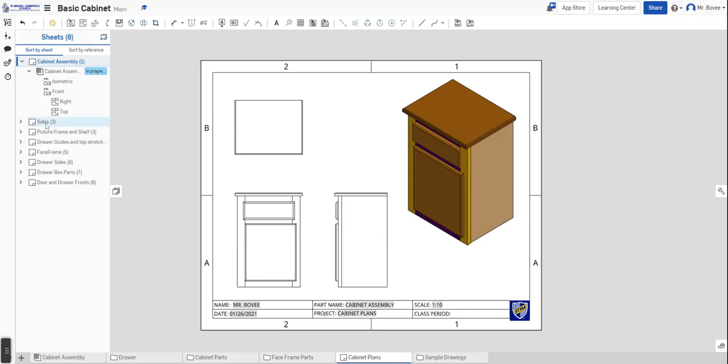The plans are provided on the Google Classroom. Start with page 1, which is an overview of the project. It has an isometric as well as the orthographic. Notice there are no numbers, since the numbers show up on page 2. You should have completed the video where we drew the two sides, and you probably used this part of the plans and those numbers.

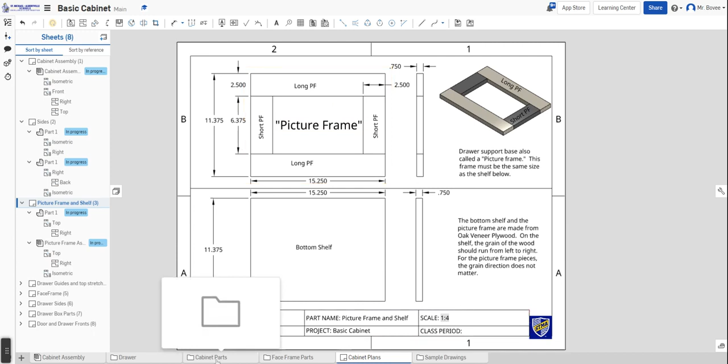This next video is going to show how to make the picture frame and shelf. Where and what do the picture frame and shelf do? Let's take a quick look at the assembly.

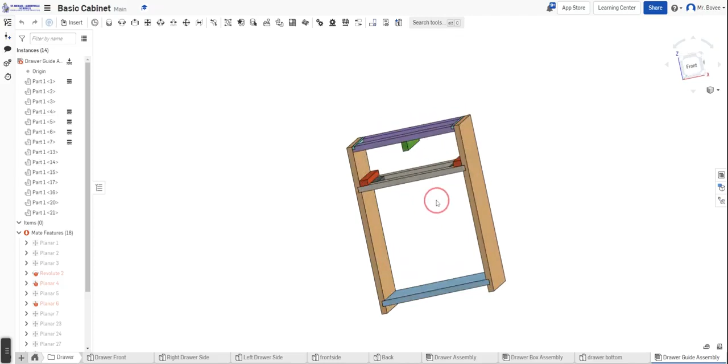Right here, this is what I call the picture frame. It's just a simple term I use, not a professional cabinet term. And this is the bottom shelf right here. So those are the two parts we're going to make today, and they help get us constructing the cabinet.

This is the exact sequence we follow when building a cabinet. We start with the sides first, then build the shelf, then build the picture frame, and then glue them together to make an assembly. That's what we're going to do today in this video.

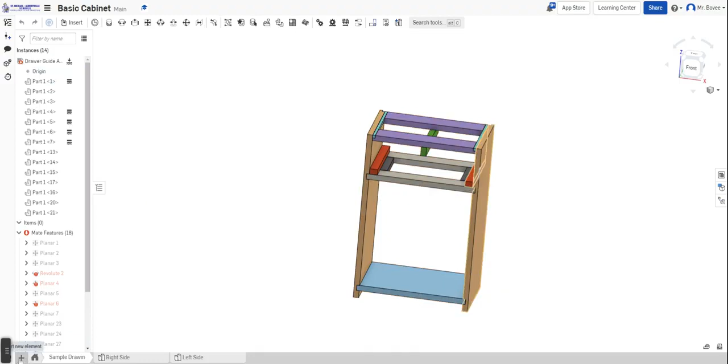We're going to replicate real life. I'm going to open a file called Sample Drawings, where I'm going to build this drawing. I already have it drawn, but we'll create a new drawing by going to Insert a New Element, Create Part Studio, and we'll rename this.

We'll rename it Shelf. If we go back and look at our plans, which I won't do since we want to keep this a quick video, that rectangle was 15.25 by 11.375, which is 11 3/8.

When choosing a sketch plane, I like to choose the one that best represents how the part is going to fit into the assembly. It doesn't really matter which plane you choose, but it makes your assembly easier if you pick the one that best represents how it sits. This shelf lays flat, similar to the top, so I'm going to choose the top plane.

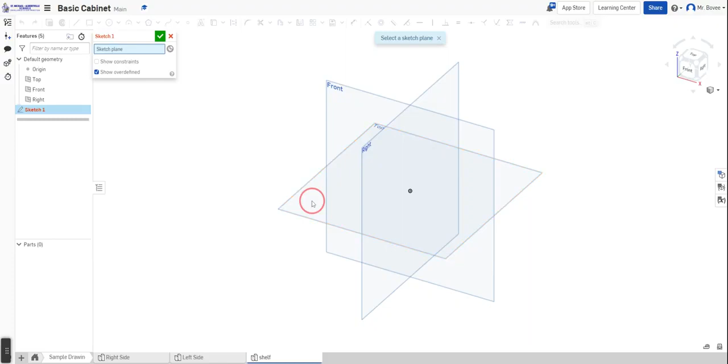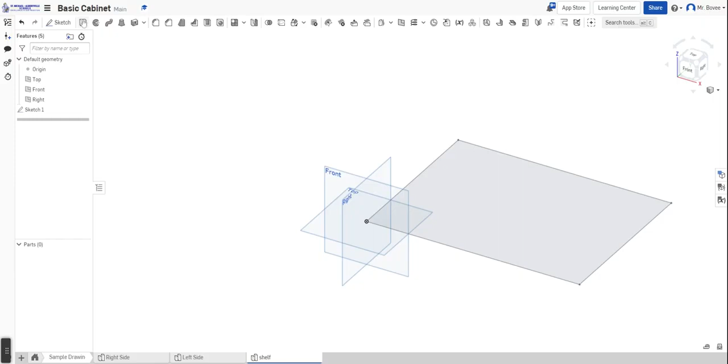The bottom shelf is a rectangle of 15.25 by 11.375, or 11 3/8. There's our shelf. All the parts we're drawing today are plywood, which is 3/4 of an inch, so we'll extrude that to 3/4 of an inch.

Just for fun, I'm going to edit the appearance of this. If I right click and choose edit appearance for part 1, I can pick any color I want. So I'll choose that color. And there we go—that's my shelf.

Now I need to make a picture frame, a long piece and a short piece. Here's the piece I just drew, 15.25 by 11 3/8. And here are two more pieces to make: a long PF and a short PF. The long PF is 15.25, and its width is 2.5. The short PF is 6 3/8, and it's also 2.5.

The purpose here is to build a picture frame that is the exact same size as this bottom shelf. All right, let's go back and do that.

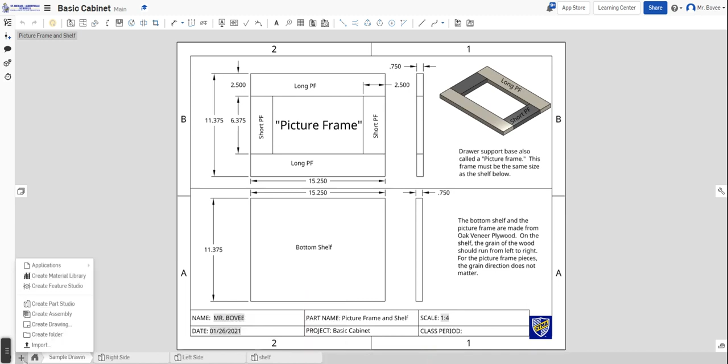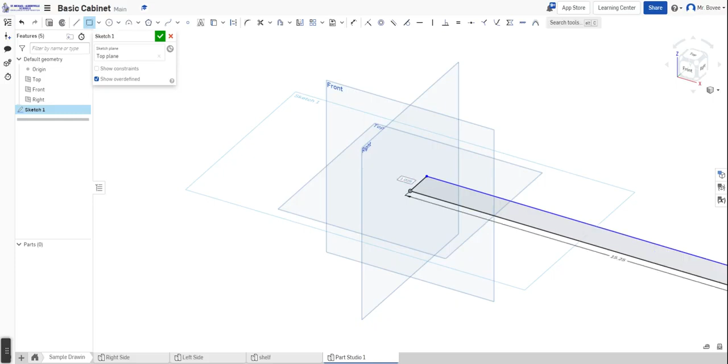So here we are in the folder for sample drawings. We're going to create a Part Studio for a long picture frame, choosing the top there, and create a sketch on the top sketch plane and draw a rectangle. That first rectangle, the long picture frame, is 15.25 by 2.5 in width. We're going to extrude that to 3/4 of an inch, and I know we're going fast, but that's okay.

Bam. I like to choose another color just because when we assemble it, it looks different. So we're going to go ahead and make that color right there. And then we will call this - it's important to call it this name - that's a long PF, because when it comes to the assembly part, it'll be easier to find.

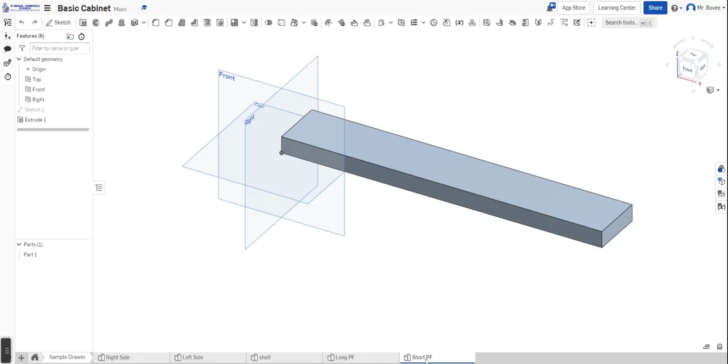Now I could go through all of those processes again, or I could simply go to duplicate, and I will rename this the short PF. PF is for picture frame. Now I want to make sure I'm on that tab, because when you do that, it stays on this long tab - I don't know why it does that. By duplicating it saves me maybe a little bit of time. I don't know if it does or doesn't, but if you're fluent in drawing a rectangle and extruding it, maybe it doesn't save you any time. But I just want to try to show you as many tricks as I can.

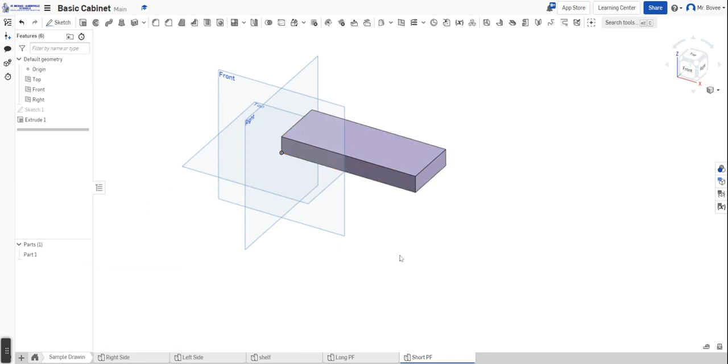So here we go, 6 3/8 by 2.5, and we saved all of those steps. The only thing I want to do now is change the appearance to something slightly different. And there we go. Okay, so I've drawn my shelf, my long picture frame piece, and my short picture frame piece. So let's go ahead and begin our assembly.

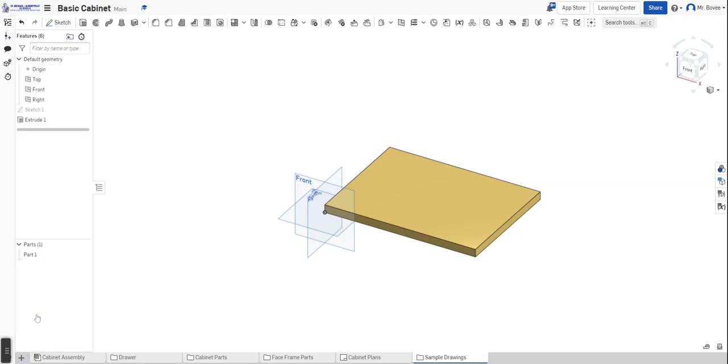All right, I'm going to go ahead and go back to this main page right here. You've already watched the organization and tips video on how to organize all your parts down here. I'm going to go down here and create a new assembly. We'll call it a sample assembly. Let's go to create assembly, and it's going to show up over here. I'm just going to leave it there, but let's rename it to sample assembly. You would name it main assembly or whatever you want to name it.

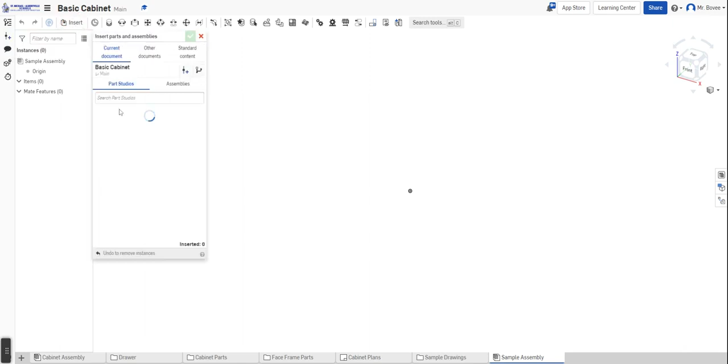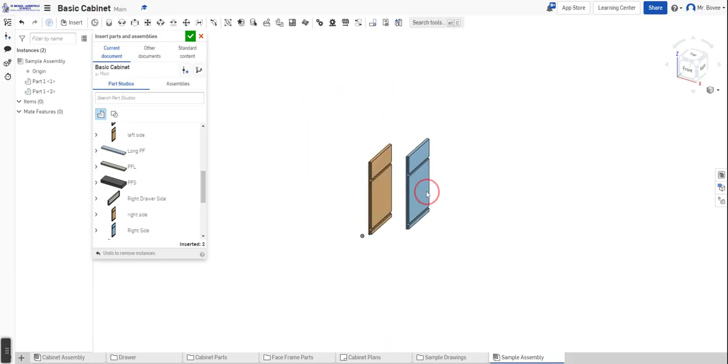All right, so this is the beginning of our assembly process. We're going to go and insert the sides. This is why you want to name things correctly here. So we're going to go left side, and then there's going to be a right side. Notice that if I just click on it, it says inserted 2 - now I'm going to come over here, and yeah, see, it had it hiding in there. So everything you click on here will show. I could have clicked on shelf.

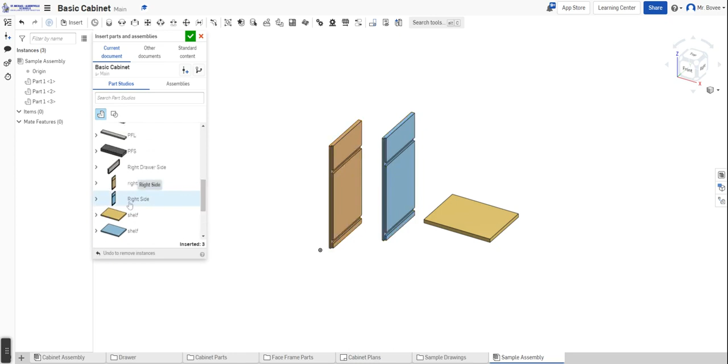There we go, shelf. And the reason I have two of them here is because I got a sample one and I got the real one. And you know what I did? I put in two left sides - you probably saw that and I didn't. So I'm going to go ahead, we'll put in a right side. And that is going to be a little better right there.

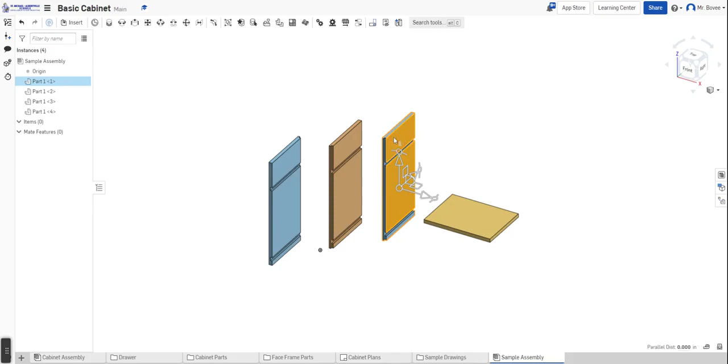So we're going to delete this one. And come on - well, let's go like this. We'll approve of it, and then we'll see if we can delete it. Right click, delete part 1. We'll do it that way.

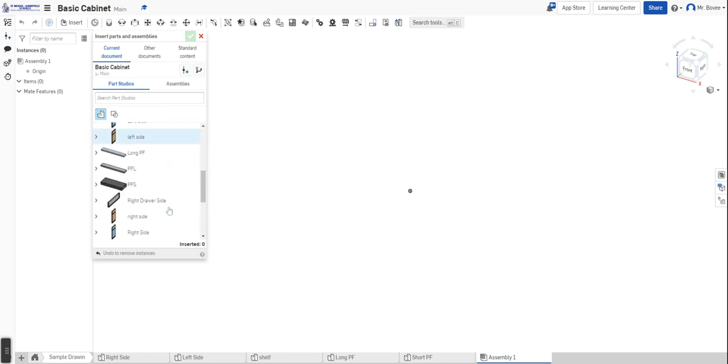All right, notice I didn't put the picture frame in there because I want to show you this trick. We're going to go back to sample drawings, and we're going to create an assembly here, and we're going to do just the picture frame, okay? So we're going to go to insert, and we're going to choose long PF1.

I need two of them, so I'm going to click on it again. See, it says right there, inserted 2. And then I'm going to go to short picture frame, 1, 2. All right, just saves you a few clicks by doing that. And then it slaps them all together, and I like to move them apart.

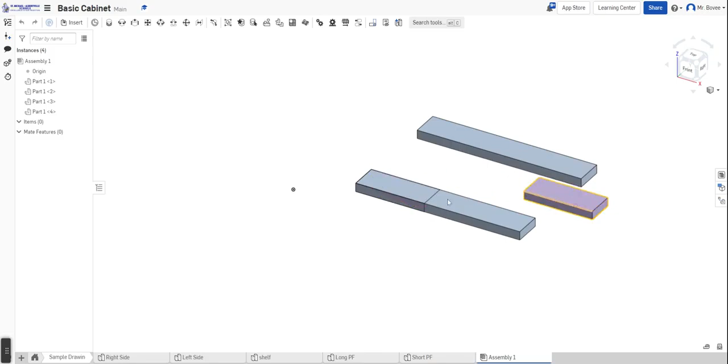There we go, now I can see them. Okay, so now I'm going to go ahead and we are going to assemble this real fast. We're going to use this corner right here, and we'll use that corner right there. Let's see what we can do. There we go, that looks good.

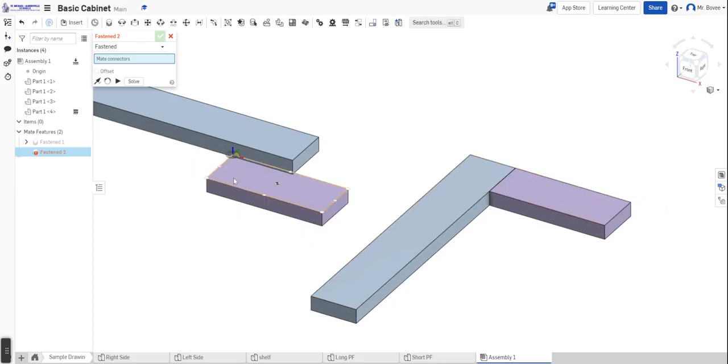I'm going to go ahead and anchor one of these down by choosing Fix. Right click and Fix. I'm going to keep on keeping on with my fastening here. We're going to go right there and there. That looks good. And then I'm going to take this piece, put it right there and right there.

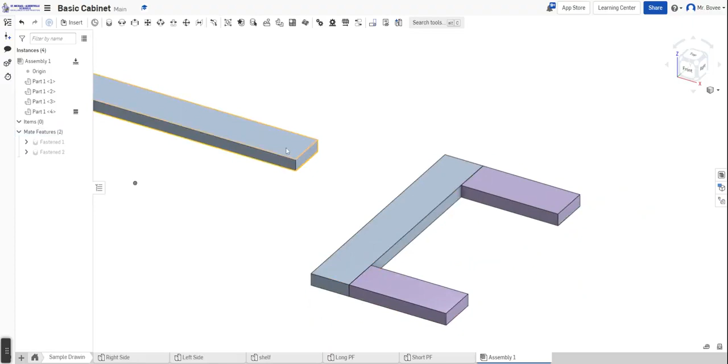Oh, yeah, that's wrong. That's completely wrong. So let's go ahead here and we'll take this piece right here. Come on, right there. And we'll go right there. All right, see, even the greatest make mistakes. Okay, there we go. There's our picture frame.

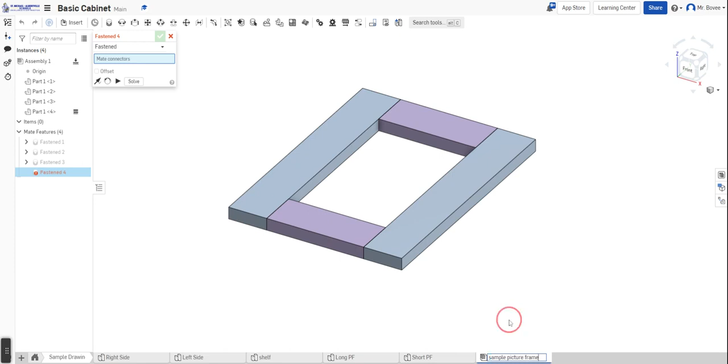Okay, now let's go back to our sample assembly where we left off here. So instead of bringing in all four of those pieces and then trying to assemble it, I can go ahead and insert that assembly and it's going to behave as one piece. And here it is, sample picture frame. It just hasn't generated a preview yet, but we'll bring that in. And it's going to save us a little time.

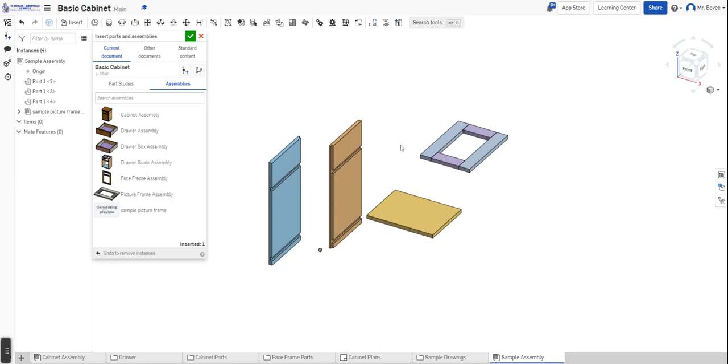You can do the same thing with the other pieces like a drawer and, as you can see here, drawer and also a face frame. So let's go ahead and approve of that and let's start our assembly.

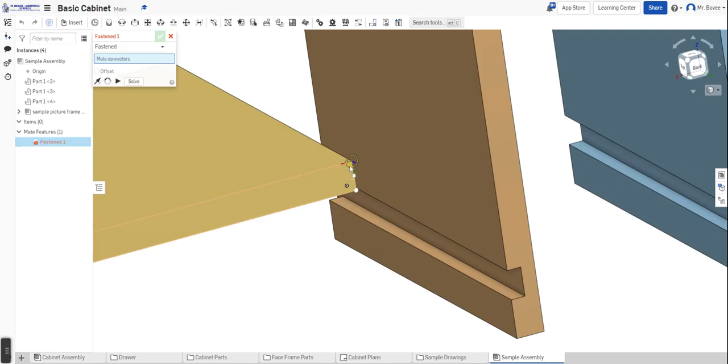I like to work from the back side here, and I think our corners are just a little bit easier to grab. So we'll go like this, and I'll use this front plane. We'll put it right there. Oh, I should have grabbed that middle piece right there, but oh well, we'll do that on the next one maybe. And then we'll grab that corner right there. And there is our shelf installed.

And I'm going to go ahead and click fix this shelf. We're going to anchor that down so that everything moves to it.

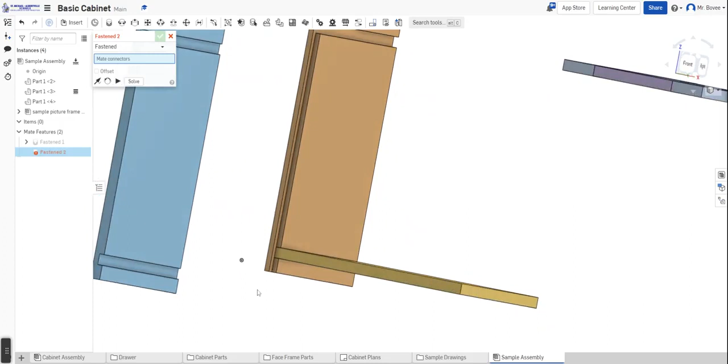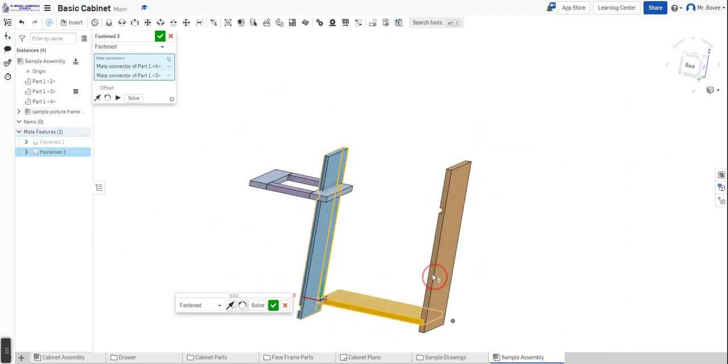So now I'm going to go ahead, and this is the front of this piece. So we'll hover over this plane, and I'm going to choose the middle piece. Hover over that. Probably the hardest thing about Onshape is getting the assembly figured out, and all the different visualizations you got to do to get it to work. So there, those four positions don't work. We'll flip the primary axes, and now it works.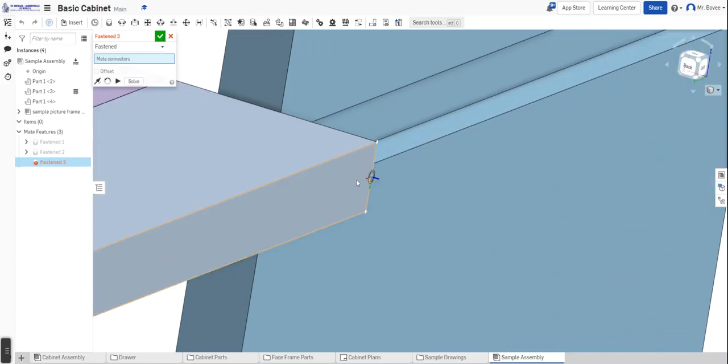So there we go. Now, all we got to do is put this piece in. So let's go ahead and choose that one, and that one. Again, it's only moving the one piece, but don't worry, let's get that piece in correctly. There we go, that looks like it's in the right spot. And then we hit solve, and it will move the rest of the pieces. And so there we have it.

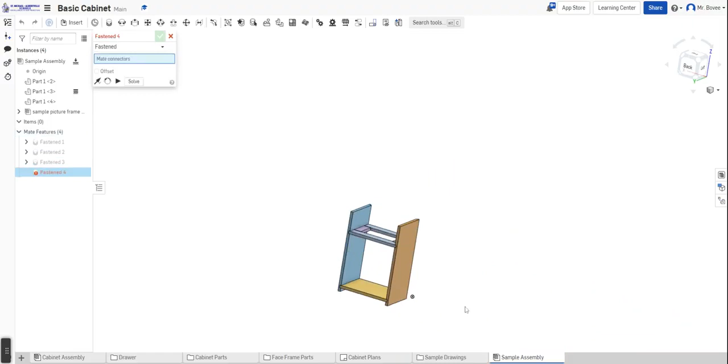That's the end of our video for today, kids. We've got our assembly made of our picture frame and our shelf. And this is exactly the way we'll do it in real life. You're going to make your two sides, and then you're going to cut your shelf and make your picture frame to the exact same size as this shelf, and then you'll glue it up and you'll have your assembly starting.